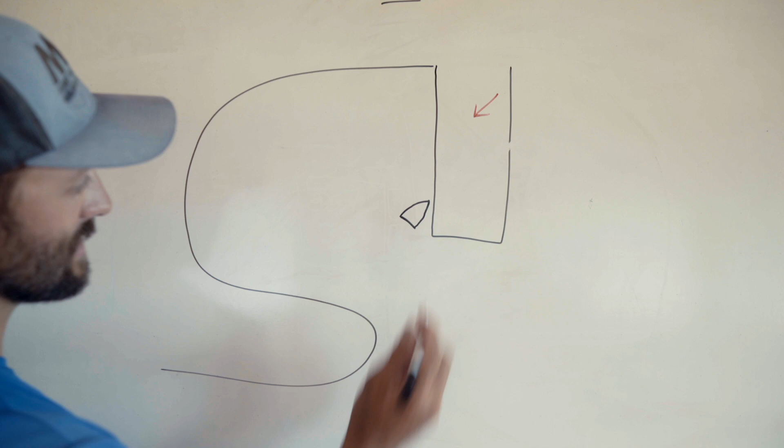We have to ask ourselves the very first thing: what direction are we going to push the boat off of? We always have two choices, we can push off to port or to starboard. There always is going to be a safer direction, and that's always the direction we want to choose.

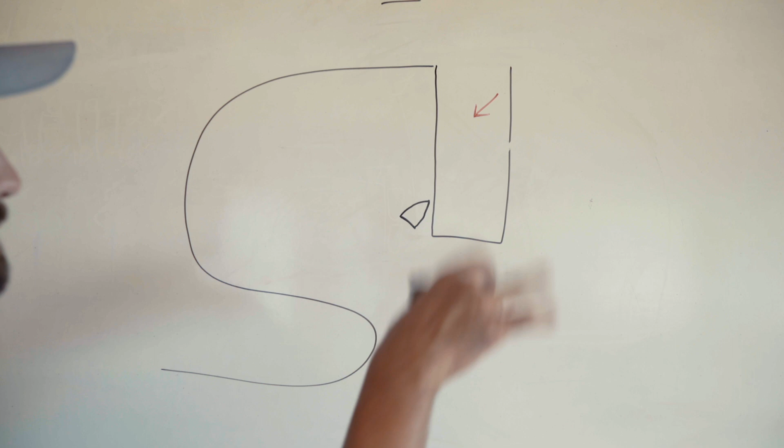I think the easiest way to think about this concept is to imagine our boat is a needle on the dock, just like that. The needle and the boat are both facing into the wind. The direction you want to push the boat off on is the direction that is the larger angle between the dock and the needle, the boat. So if we look at our needle right here, the port side is a much larger angle than the starboard side. So in this instance, we would push the boat off on the port side.

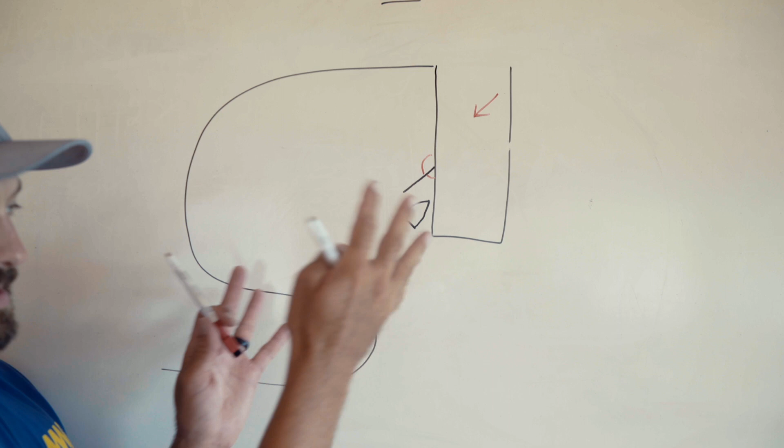Now, something we see a lot: let's say in this instance we have a boat right here, and people will say, well, the exit's right here, I just want to push the boat off and sneak out and go where I need to go. So what they'll do is try to push off to starboard. What they run into though, and we see this all the time, is as soon as you push the bow in the wrong direction like this, the boat's going to exit the no sail zone and it's going to power up and hit the dock.

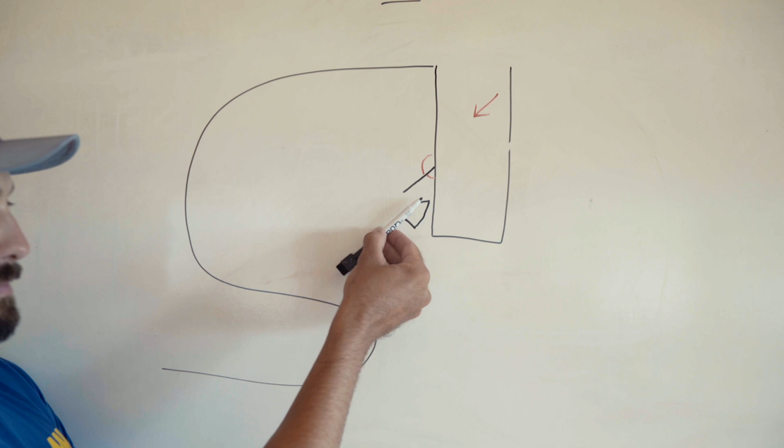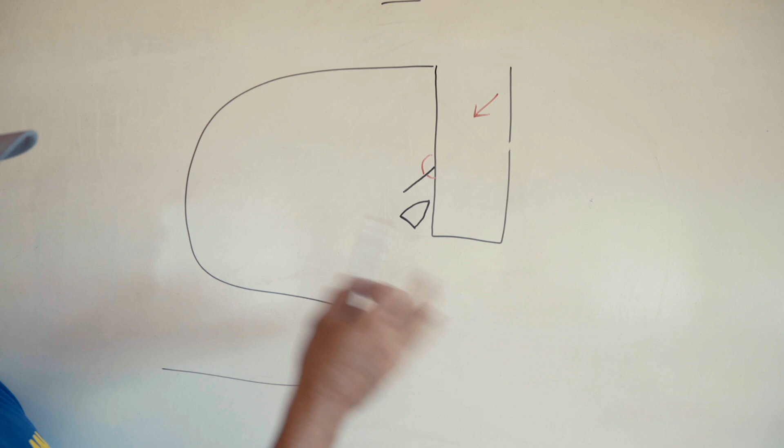So a lot of times we'll see people push away and then bounce the nose of the boat down the dock until they get out. Or sometimes if they're back here, they might be able to turn the boat tight enough, but then they basically sideswipe all the boats on their way out. So we really want to make sure when it comes to launching the boat, we always want to push off in the safest direction, whatever side is going to be the larger angle.

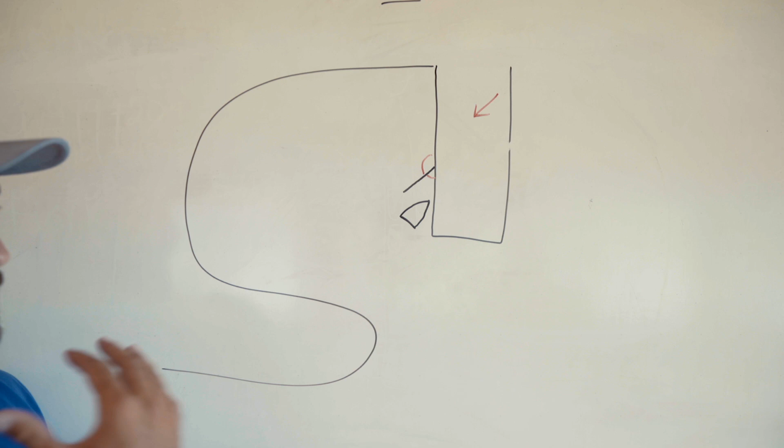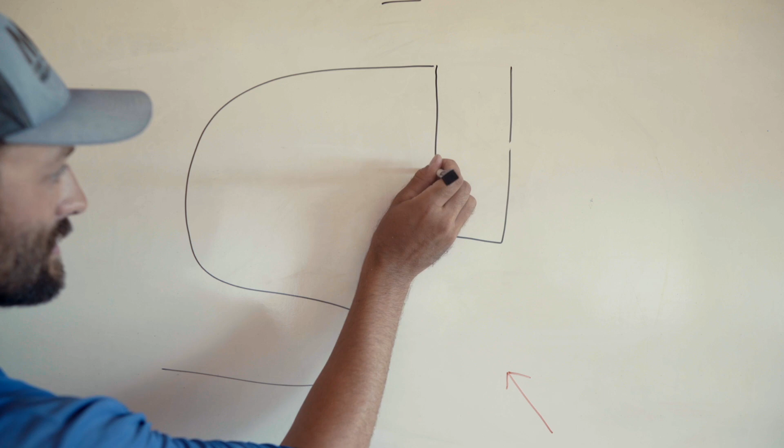So what I'm going to do is give us some different wind directions, and I want you to think about which direction we're going to push off, port or starboard. All right, we have the wind coming from the southeast. Our boat is facing into the no sail zone. What direction will we push off? It's going to be to starboard. That's the larger angle. If I draw the needle on the dock, you can see this is a much larger angle than that, so we're going to push off to starboard.

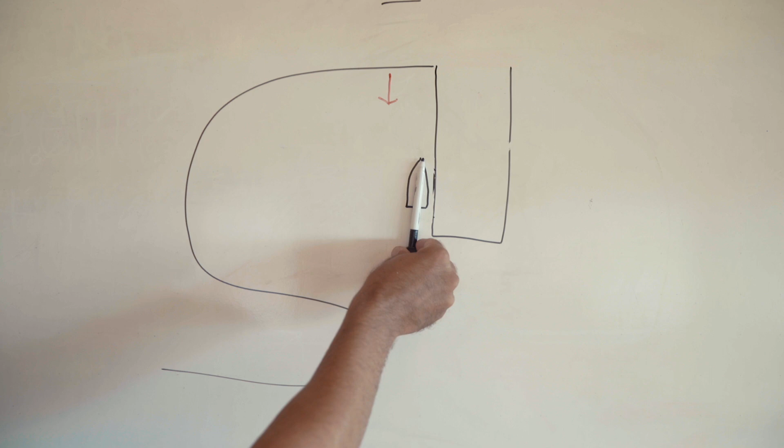All right, we have the wind coming from the north. Our boat is alongside the dock. Port or starboard? Port. This direction is going to be the way away from the dock. That's going to be the safest way for us to depart. And then as we sail away, we'll need to either tack or jibe to exit.

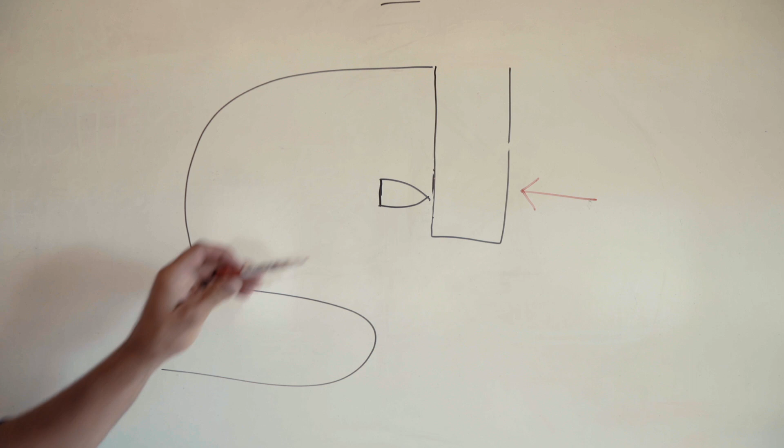In this instance, the wind is coming directly out of the east. So what direction, port or starboard?

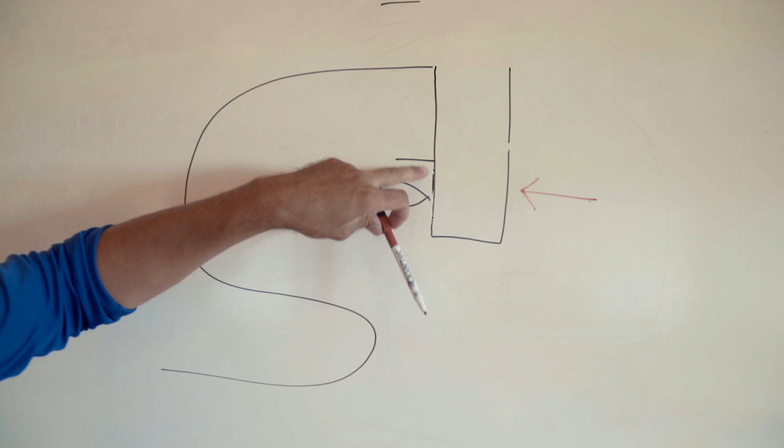Technically, it doesn't matter. The boat, if you look at both angles, they're the exact same. So we could push off to port if we wanted, or we could push off to starboard. A lot of people in this instance opt to just push off to starboard because that's going to be closest to where they want to go.

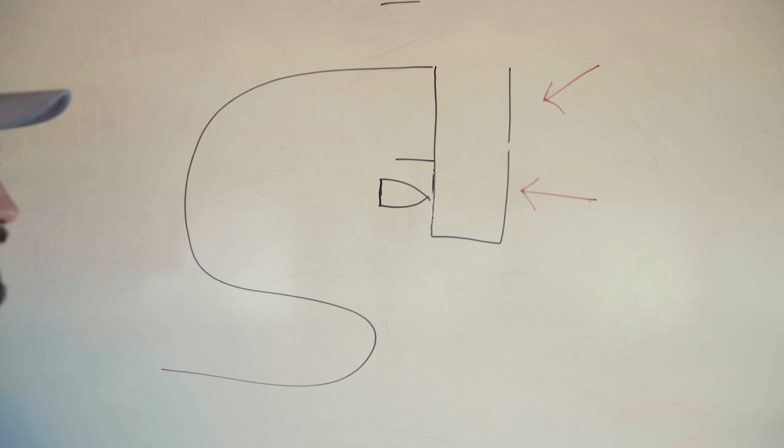But what we want to keep in mind with this instance, because it's a little bit different, is the wind is rarely going to be coming directly out of the east. Normally, if it's coming out of the east, it's our trade winds, which are going to be bouncing back and forth between east and northeast. So if you're out there rigging for 10 or 15 minutes, check the wind vane on the top of the boat, see how the boat's moving on the dock, look at the American flag, because more than likely the wind is going to be switching from east to northeast.

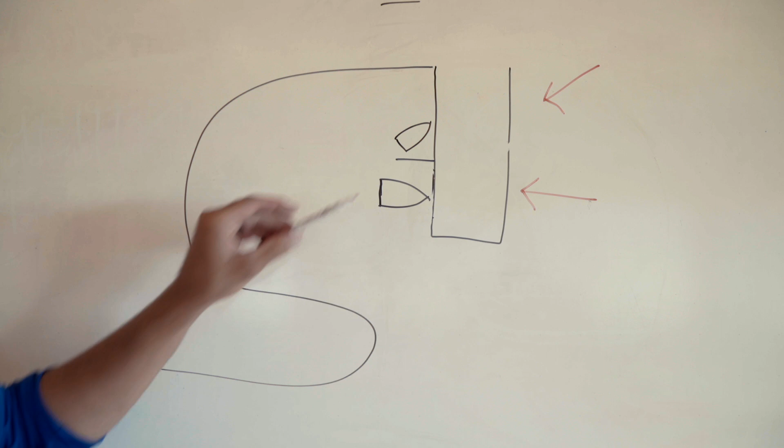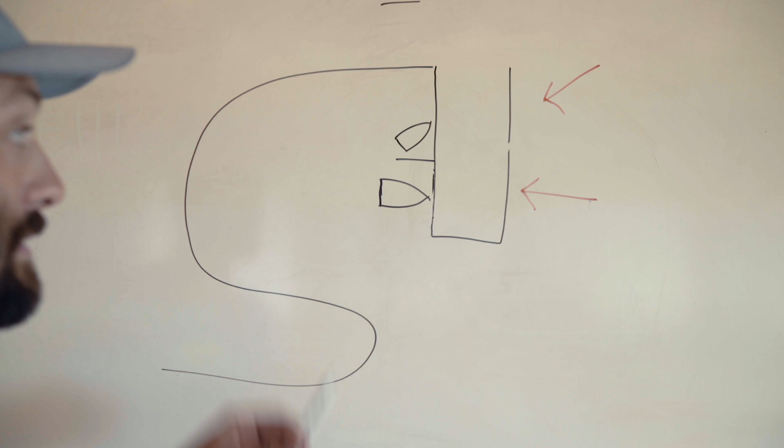So if we keep that in mind, that means the boat's going to be rotating from directly east, kind of over here like this. And that would mean that we want to push off to port. So if we were going to depart the dock with an abundance of caution, knowing the wind's going to be bouncing back and forth east, northeast, we should probably push off to port. If you're going to be quick about it, and the wind's coming from the east and the boat looks good, you can push off quickly before it changes. That's something you can absolutely do as well. Just keep in mind, easterly winds normally are bouncing back and forth east, northeast.

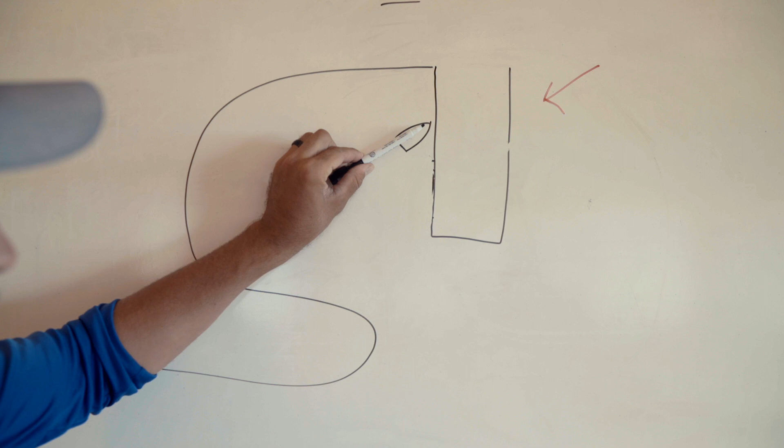The second major thing we want to keep in mind when departing the dock is we want to anticipate what we need to do with our sails. So if we look at this boat and say, okay, what direction are we going to push off, port or starboard? We're going to push off to port. That's the larger angle. So let's say the boat pushes away from the dock, we turn away from the dock.

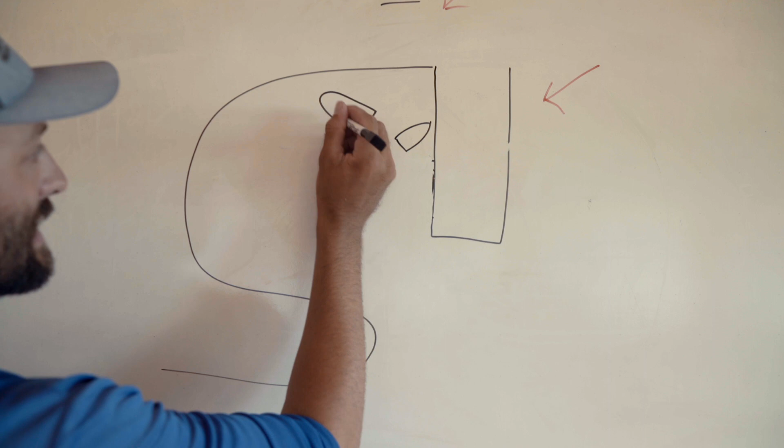What point of sail do you think the boat's on, based on where the wind is coming from? The boat is probably going to be on a beam reach. So before you push off, you want to think, okay, as we're turning away from the dock, what point of sail are we going to end up on? Because we know we're going to be on a beam reach, we want to have our sails preset so that as we turn away from the dock, as soon as we're safely away, the sails are going to fill with air and then you'll be able to sail away.

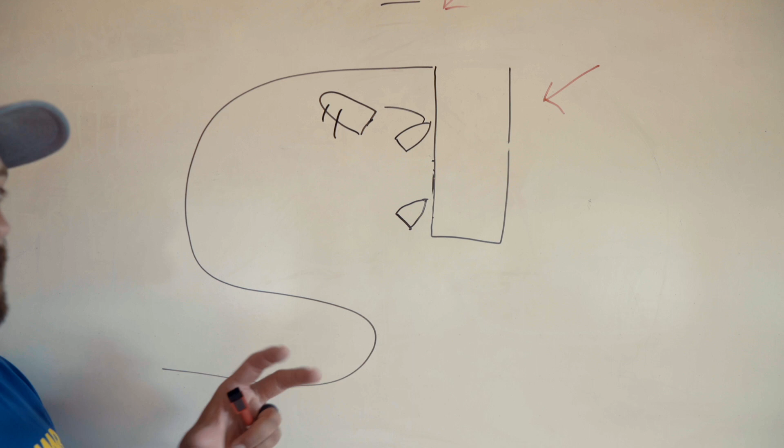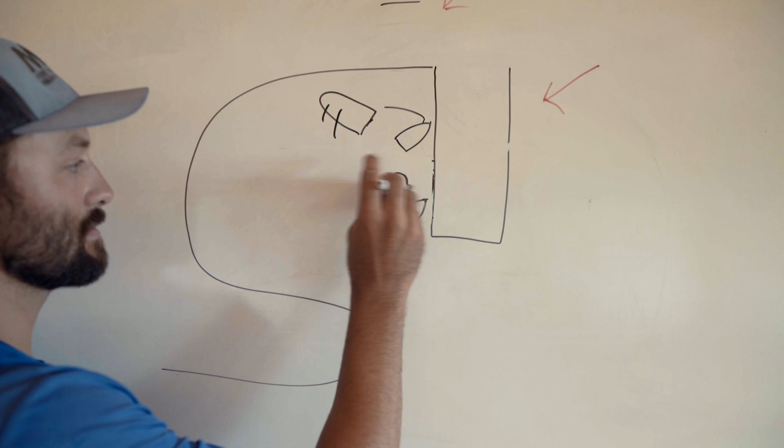A lot of times, this is another place we see people mess up, and what they end up doing most of the time is they have their sails in too far. Let's say this boat up here pushed away from the dock with their sails preset about halfway out. They got away from the dock, no problem. This other boat pushed off, but let's say they had their sails all the way in.

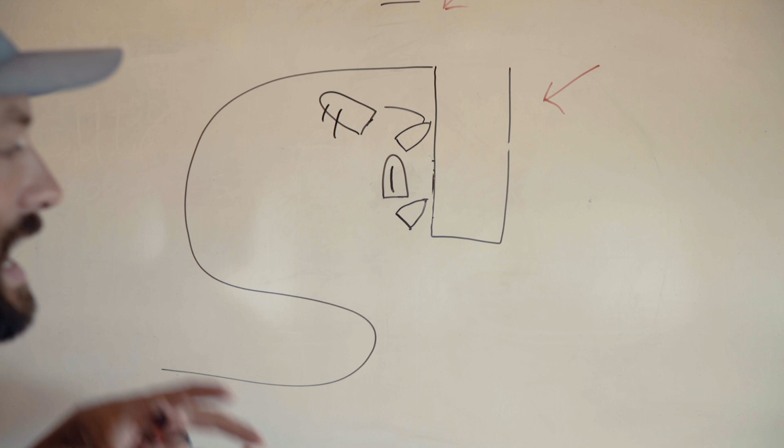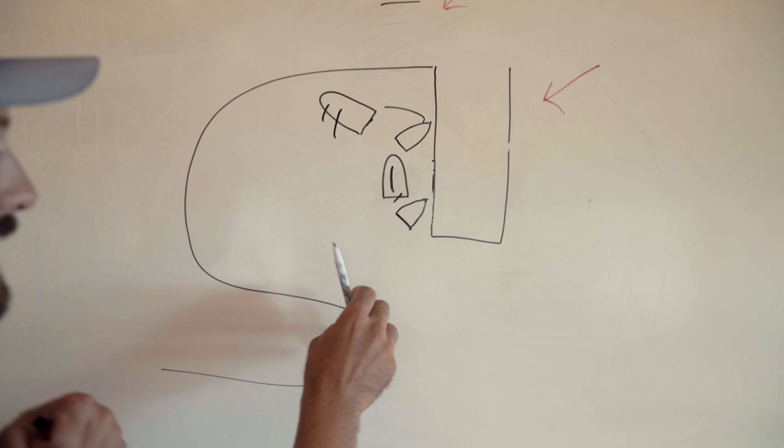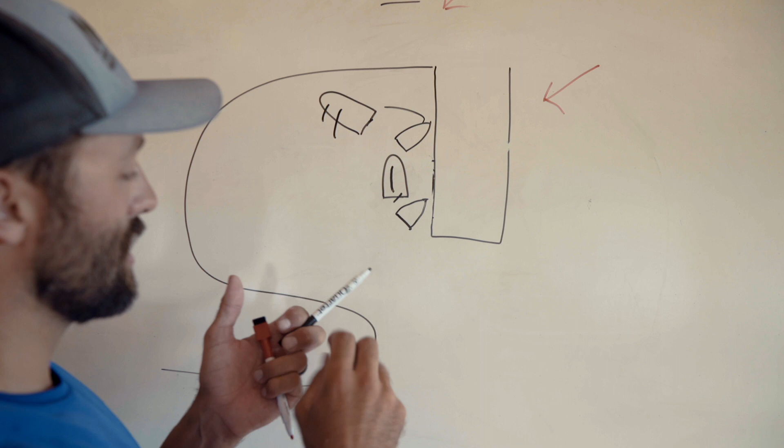You steer the boat as much with your sails as you do the rudder. So even if you're doing the right thing with the rudder, if your sails aren't in the right spot, you're going to have a hard time steering the boat. So someone would push the boat away from the dock and have the tiller pulled all the way towards them because they're trying to steer the boat away from the dock. But their sails are in all the way, which is trying to pull the boat in the opposite direction. So the tiller's trying to pull the boat one direction, the sails are trying to pull it the other direction, which means the boat is just going to go straight.

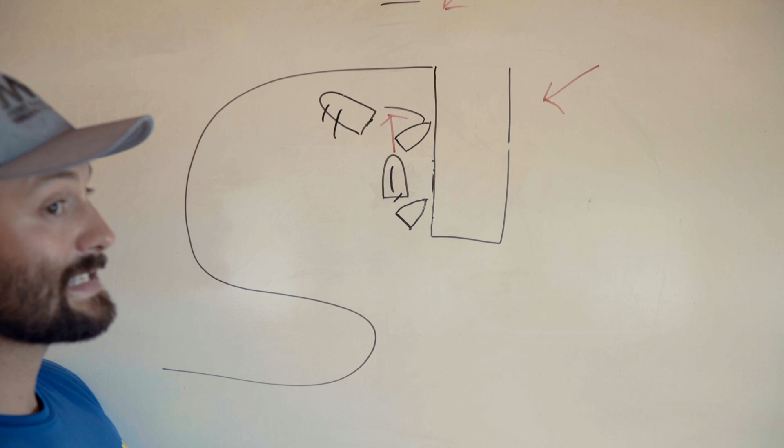And a lot of times what happens is this boat ends up hitting the other boats or hitting the shoreline, the dock area. So a lot of times, if you're trying to turn the boat and the boat's not moving, ease your sail out. We have to steer the boat as much with the rudder as we do with the sails.

It's tied up with just the bow line because we released the stern line, which means the boat is facing into the wind right now.

The second main thing we need to focus on is anticipating what we need to do with our sails, what point of sail we're going to be on. Christian has already anticipated that we're going to be on about a beam reach, so our sails should be about halfway in and halfway out when we push away from the dock.

Remember, we steer the boat as much with the sails as we do with the rudder. So if our sails are in the wrong spot, too far sheeted in, that's going to make it really hard to steer away from the dock.